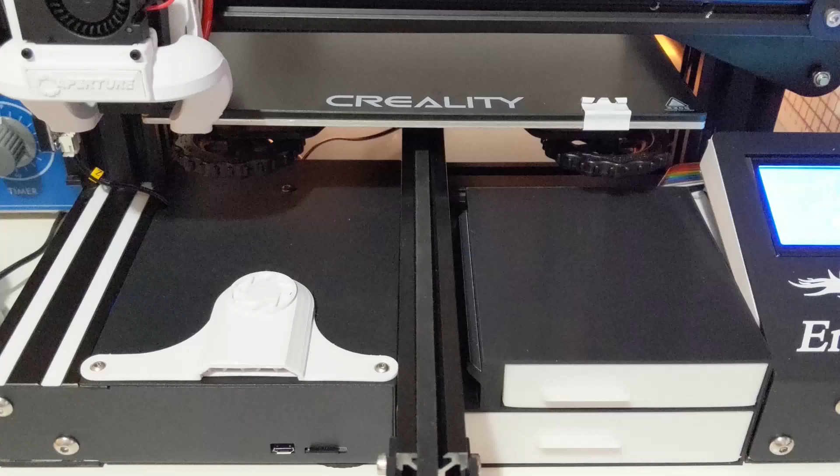Today we're going to be designing a mount for the TP-Link C200 smart camera, and we're going to do that in Tinkercad. This was a request from a friend and he wanted a mount for it to sit on his windowsill that will give him some height adjustability and some tilt functionality. Now looking online we have found a couple that offer the height but not the tilt.

So let me throw up my sketchbook on the screen here and you can see we went through a couple of iterations of designing to try and figure out how we were going to do it. Now my first design, as you can see here, was a ball and socket joint with a screw thread in the ball and sockets that would enable the height adjustment and the tilt adjustment all in one ideally simple solution.

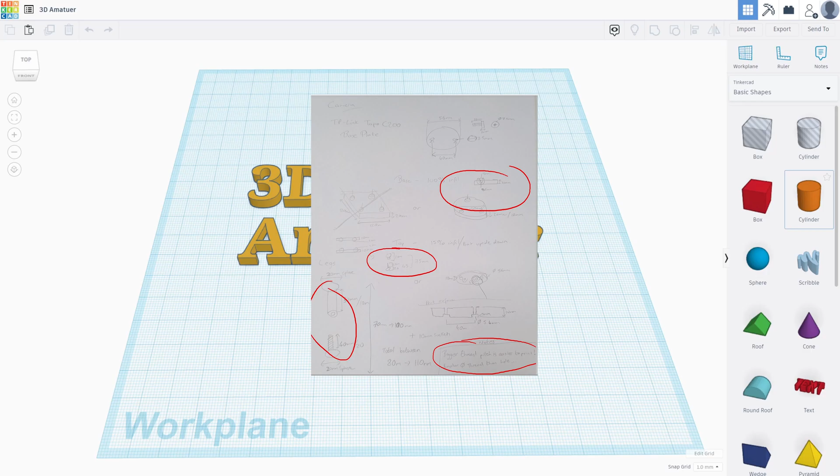But it turns out that 3D printing screw threads is not the easiest thing in the world, and for the size that we're looking, it's going to be quite weak with PLA. So I decided to abandon this idea and go with a scissor lift. After looking online, I found this, and it's a scientific lab jack. Now this is ideal for what we need.

So it has a height adjustment from 45mm to 150mm, whereas we need from about 50mm to 100mm. So this is perfect and it's within that range. However, it doesn't have the tilt functionality. Now I was given two options here.

I could purchase this and design a top plate for it that enabled the hinge functionality, or just go full on and design. And as this is a channel about me learning 3D design, I thought I would design everything. Although we are going to take the ideas from here and we're going to implement them in our own way.

So the camera we're designing for is this one here, which is the TP-Link Tapo C200, as I said. And as you can see, it can be mounted upside down, on a wall, or however you want to mount it. And the way that this works is it has a base plate that has a bayonet fitting on it that the camera attaches to, and it has two screw holes so you can attach it to a wall.

So if we return to the sketchbook, you'll see that what I did was got the measurements from that, and I've measured out the size of what I want it to be, and that center circle is the size of that base plate, with the two screw holes slightly offset, so when the camera attaches to it, it is centered.

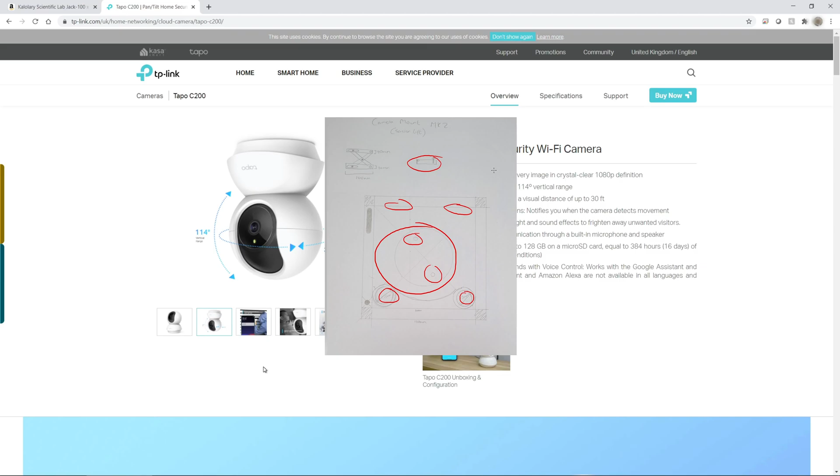And what we're going to do is we're going to have a simple base, which I've already designed in Tinkercad, and then we're going to design the top that has a functionality where it's going to have two hinges at the top here, and it's going to have two screw threads here, and as you can see from this little diagram here, they're going to go through, they're going to rub against the base inside, and it's going to create that tilt functionality.

So here we are in Tinkercad, and you can see my Aperture Science logo designs, but we'll save that for another video. And you can see my first iterations of the ball and socket joint with the screw thread.

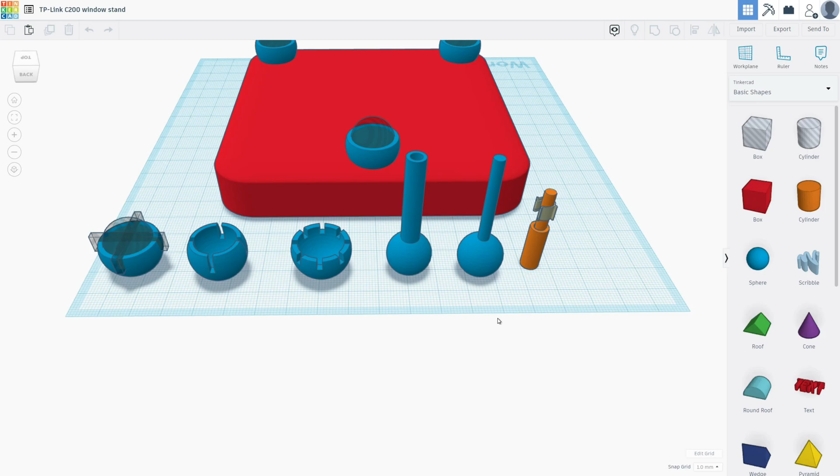Now the ball and socket work perfectly, but the width of this and this was way too small to be able to be effective and hold up any weight, and was very weak indeed. So the first test prints I did of the ball and sockets and the screws did not go to plan, and everything broke. And the screw thread didn't work because it was too tight, a whole host of issues. So I abandoned that idea and we started on this one.

So if I load this up, you can see here my design for the base, which is very similar to the lab jack stand that we just saw on Amazon, and it has the sliding hole here, circular hole here, and the arms. I've left this one open so I can show you how I designed these, which is very simple, just using primitive shapes, and I can give you a quick example of that if I ungroup these.

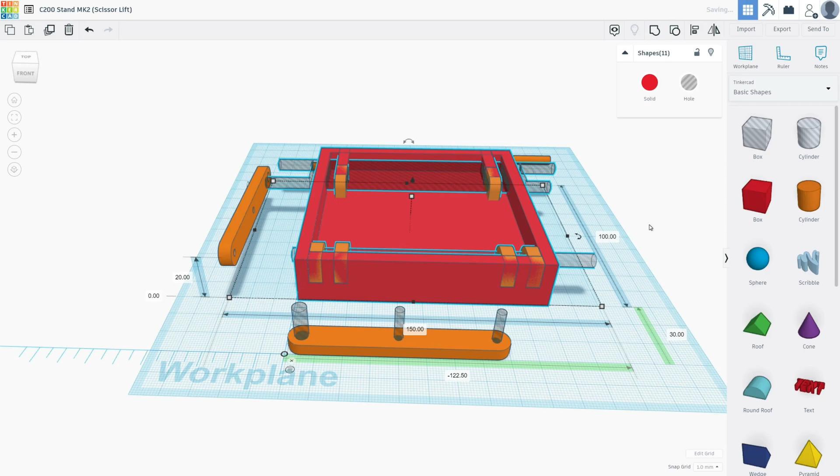So if we ungroup all of this, you can see there's various primitive shapes in here and other primitive shapes that we've set as holes. So Tinkercad is very simple to use in this respect. So if I group these together again, using the group function at the top here, you'll see they become one object. And that's the basic design process.

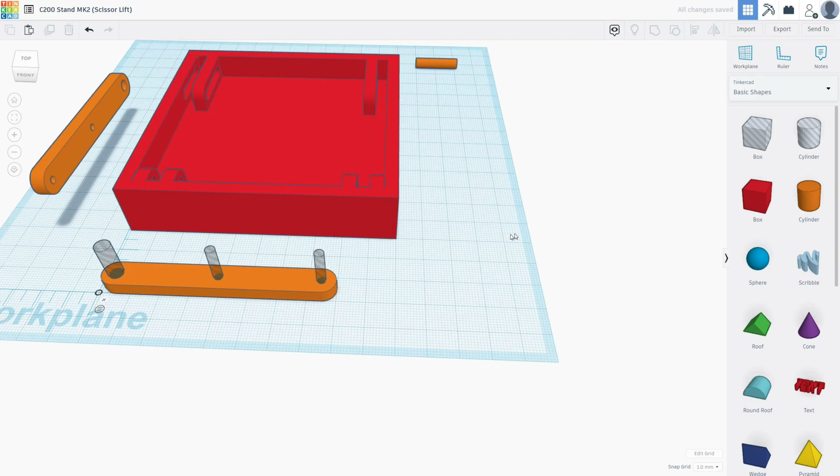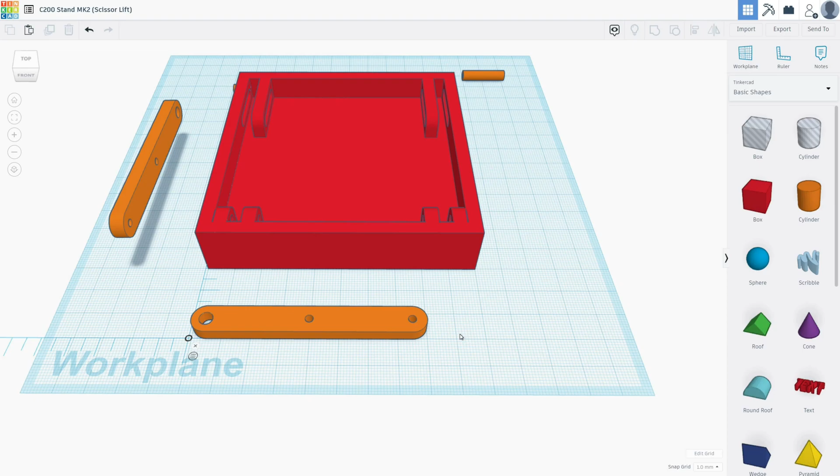I've tried to keep everything as simple as possible and using primitives and some very basic holes, as you can see here. So if we group these together, you'll see that they then become one object with the holes exactly where we need them. I've designed this around the M3 screws. I have quite a lot of them from another project that I was doing, so I've tried to design it in such a way that I use M3 screws for almost everything except the bit that allows it to extend.

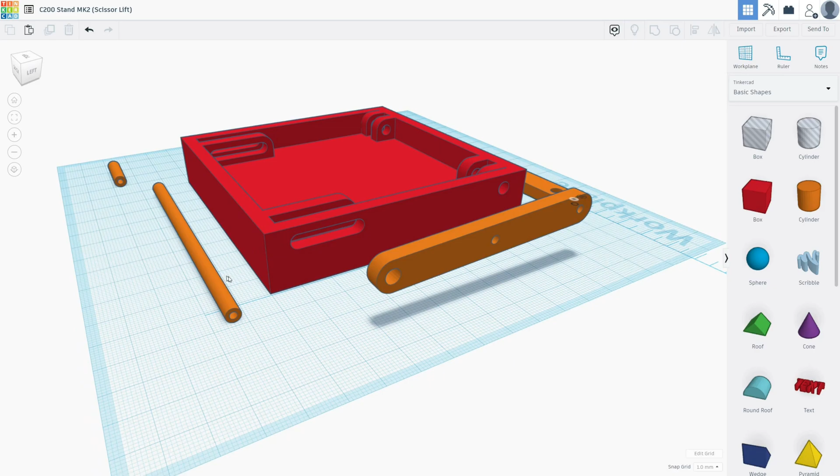So that's what these are here. So we have one of these that's going to go through here and it's going to attach to here, and there's going to be on the outside a washer and an M3 screw. That will then screw into here and hold that tight, and we'll have exactly the same on the opposite end. And then the smaller ones are to go in here to do the exact same thing.

Future me here, just jumping into the video to point out that this system didn't actually work. The axles on the left of the screen there don't really work at all. They were too small because I keep forgetting what scale I'm working in, and they were just too flimsy to hold any weight. So I did redesign another system that fits in place of that, and we will see that at the end of the video in the final assembly, so stay tuned for that. And now back to the video.

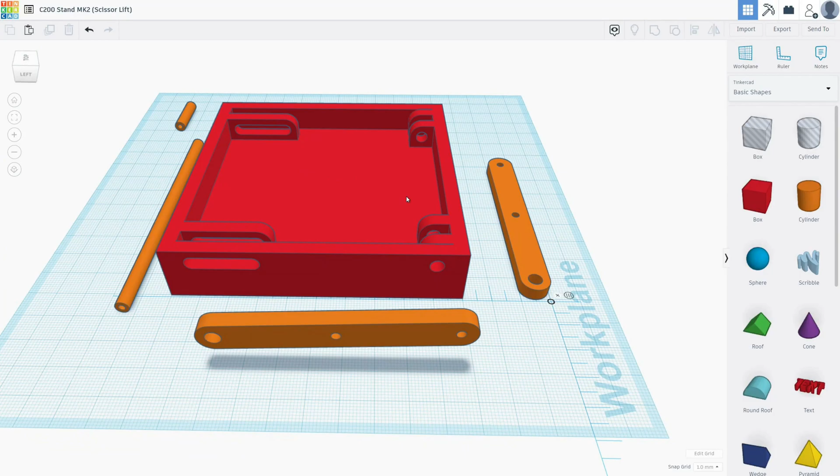So once this is all connected, we'll then have the scissor function, and now we just really need to design the top. But before we do that, I'm going to save these files as STLs to make it easy to print. So to do that, really simply we'll select the item that we want, because I don't want to print all of these in one go. So we're going to select that, and we're going to go to export. Hit STL, and then it will download it as an STL file.

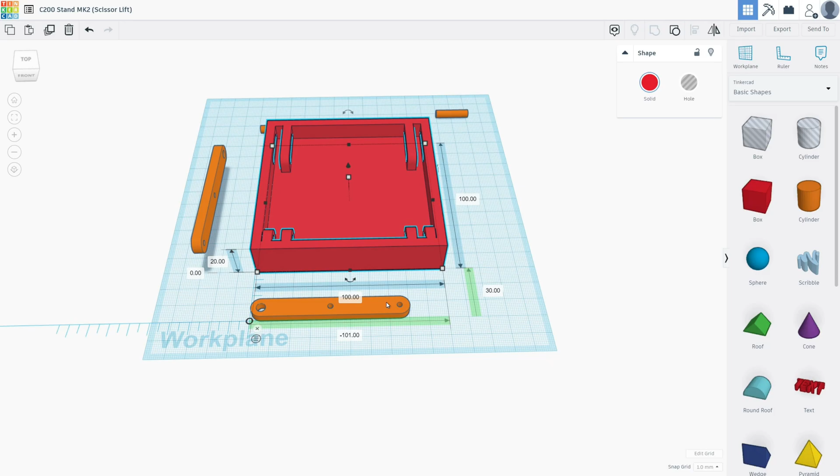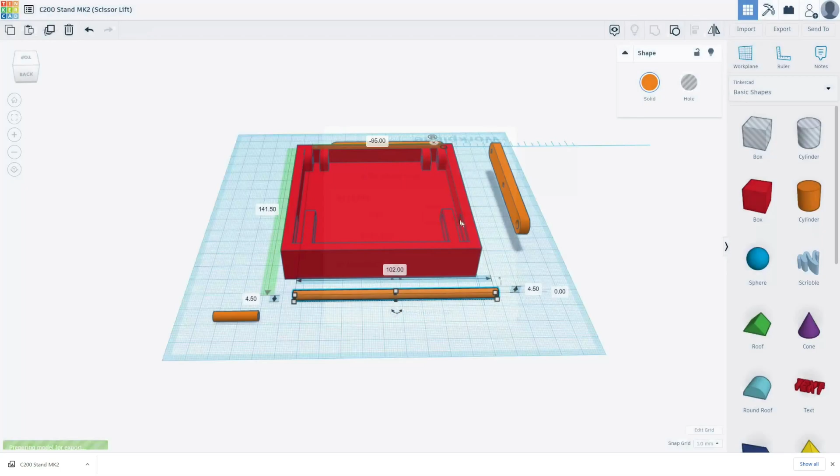Then we can select one of the arms, and we'll do the same thing, export as STL. Now you can export all of these in one go, but as I've been designing different things on the same work plane, I want them all to be separate. And then we'll do the same thing with these two here. So we'll export that as an STL, and then we can export that as an STL. Let's get designing the top.

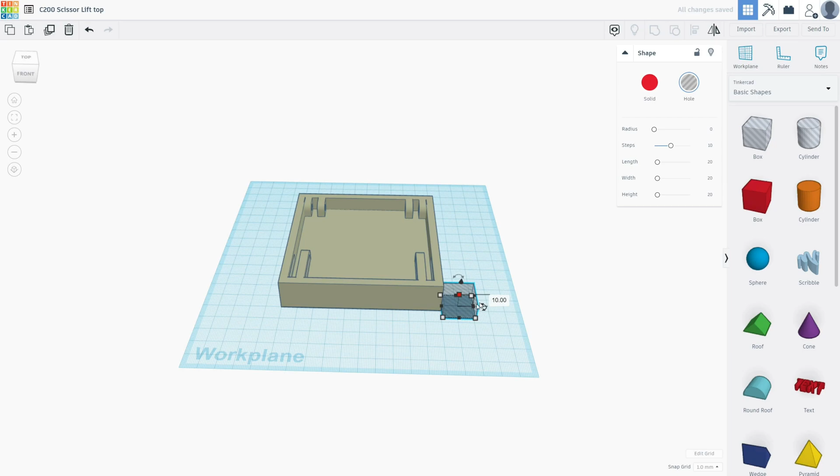So I've opened a new project in Tinkercad, and now we're going to design the top. Now the simplest way I can think of doing this is we're going to take the top that we just exported, import it again, and now we're going to create a hole, and we're going to completely cover the bottom half of that, group them together, and export this as an object. So that will be our top. And then what we'll do is we'll design a very simple plate with a hinge, and then we'll attach that after the fact when we go through assembly.

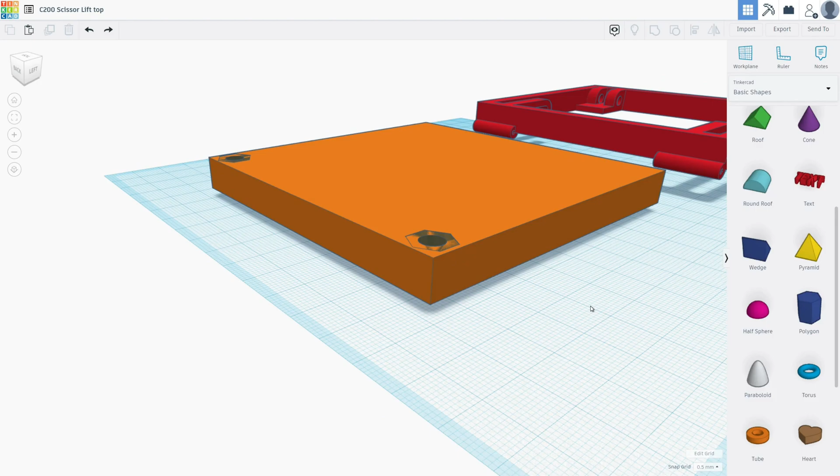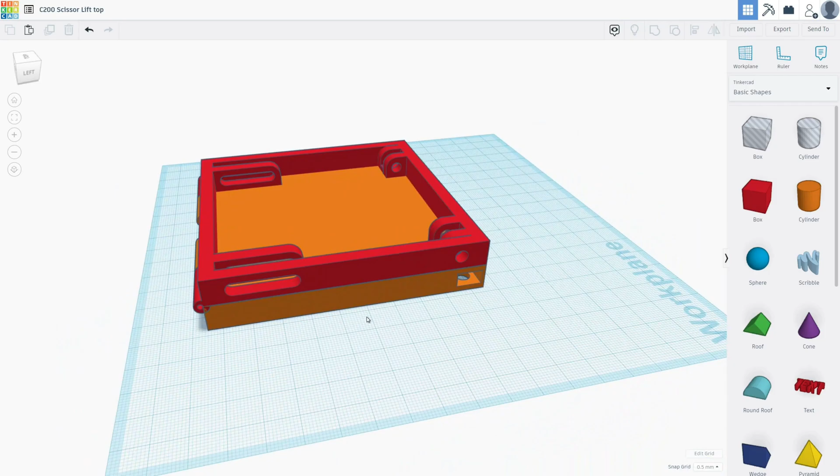So there we have it. That is the final design for the hinged top. We're going to have the hinges here, and this is going to rotate that way. Oh, keep me doing that.

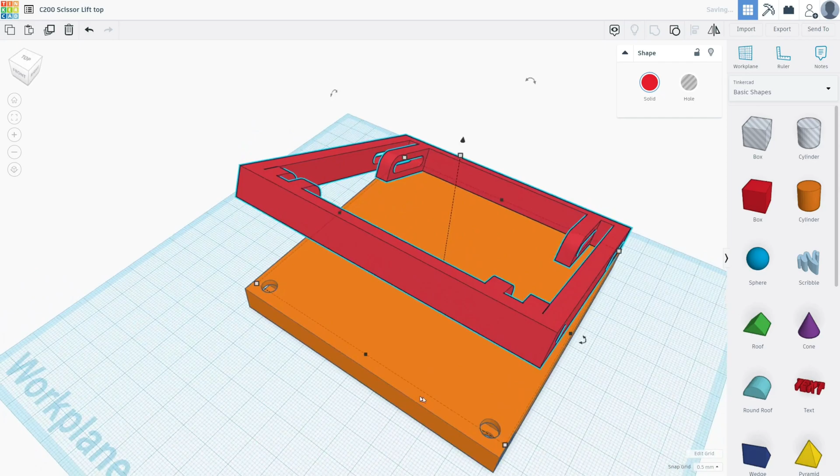And raise up. And the way it's going to raise up is by using an M6 nut in here with an M6 bolt in there, and that's going to screw upwards into this plate here. Well, not into, but onto. And then that should support it enough with the additional supports here and here to be able to raise it just by that little bit. So hopefully that should all work.

I don't see any reason why it wouldn't, but just to be sure, what we're going to do is we're going to test print this little section here and see whether it works. So to do that, I just need to extract that from everything else, save it as an STL file, and then we'll do a quick print.

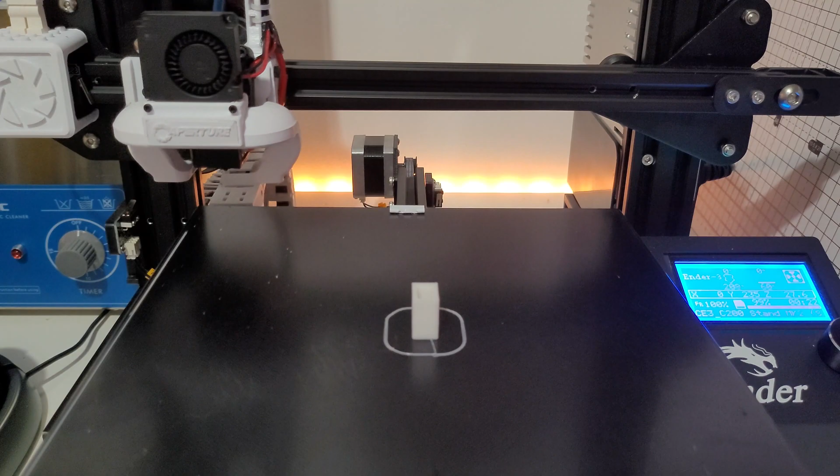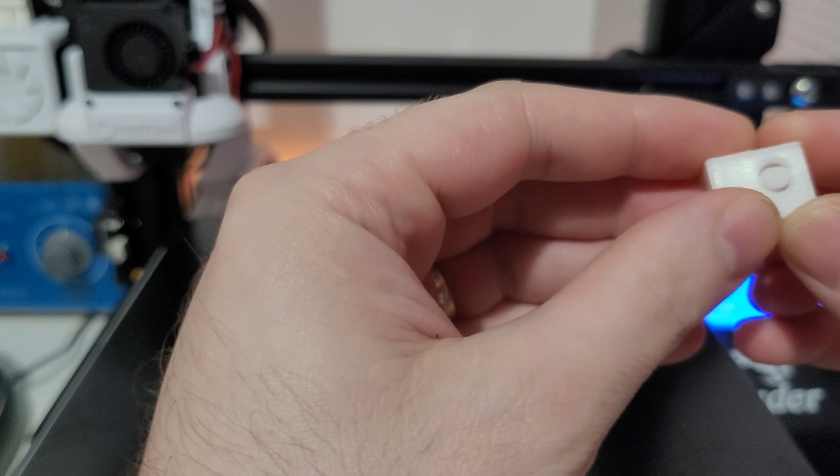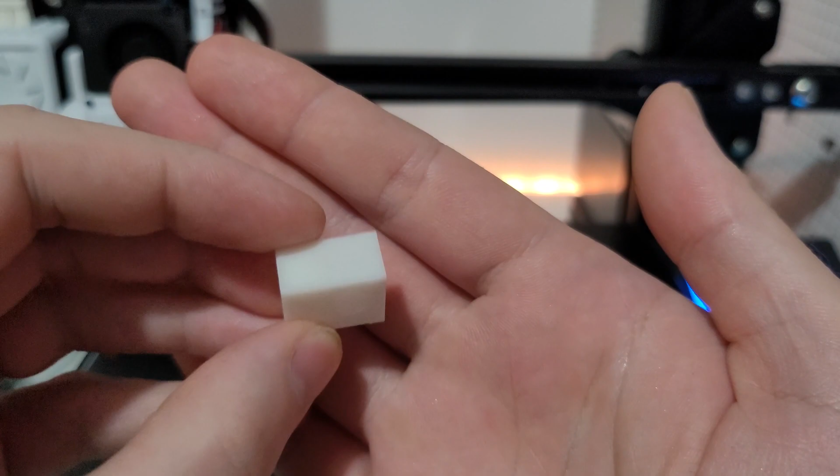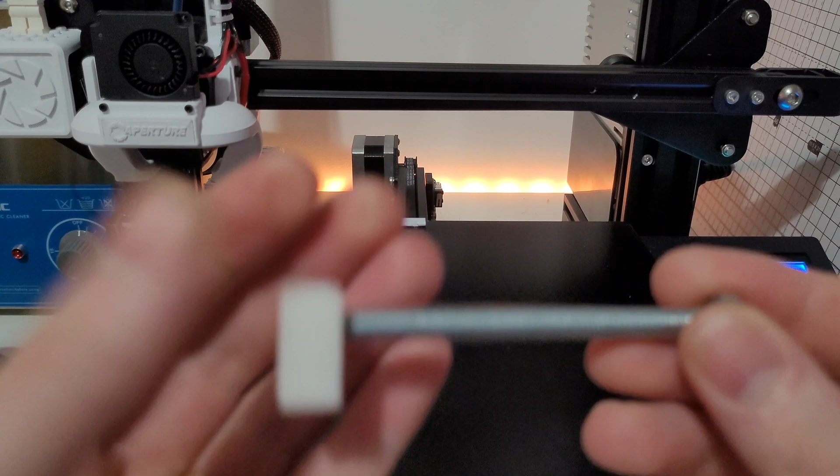Okay, that seems to have worked. Let's poke out these holes, get a nut in there and see whether it actually manages to... there we go. Yeah, poke out them supports and see if it works. Okay, so supports are out. It does just about fit. You do have to screw it, but it does just about fit a 6mm bolt. So that is good. Let's get a nut in there and hopefully it will work if the camera decides to focus.

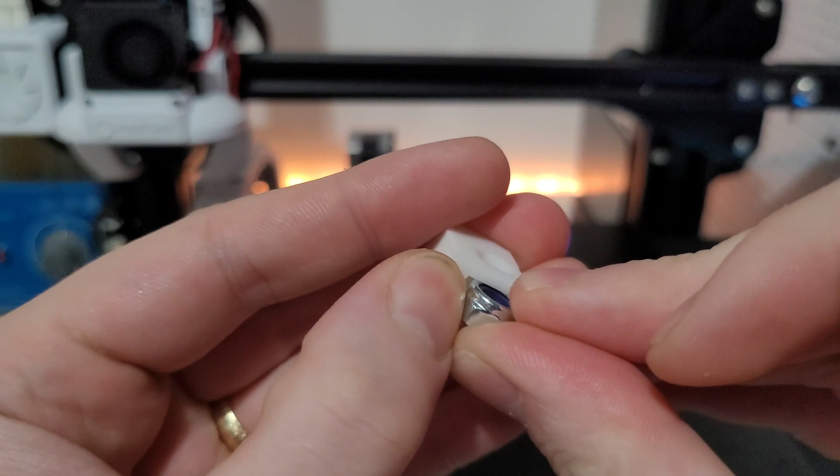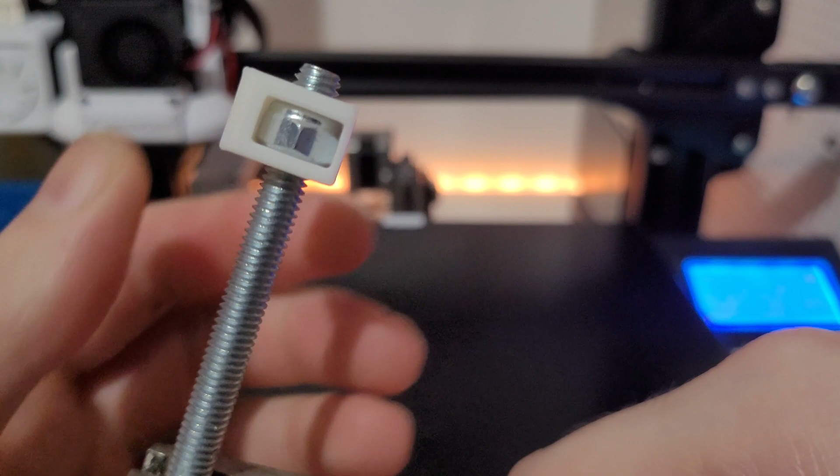Oh, that's a little bit of a tight fit. Oh, look at that. Beautiful. Right, and then screw. Ooh, oh, that's a bit tough on the old hand tightening. And there we go, we're able to tighten the bolt. That should work perfectly.

Okay, so after that successful test print, there's only one thing left to do, and that is to put the mounting system for the camera into the other side of this.

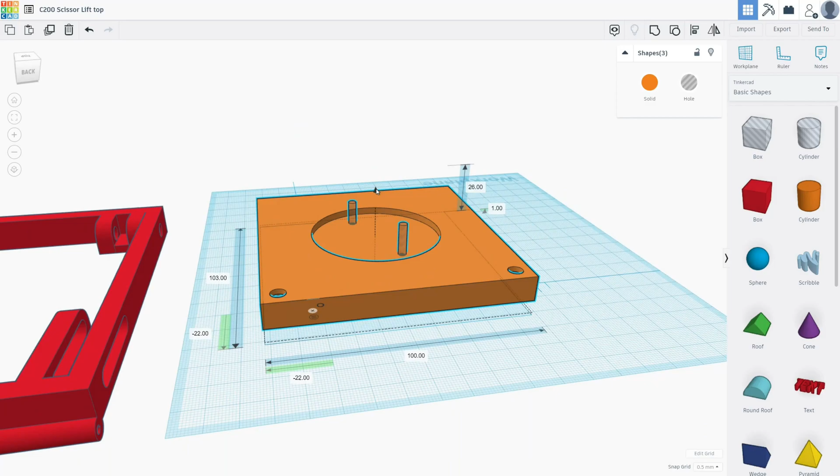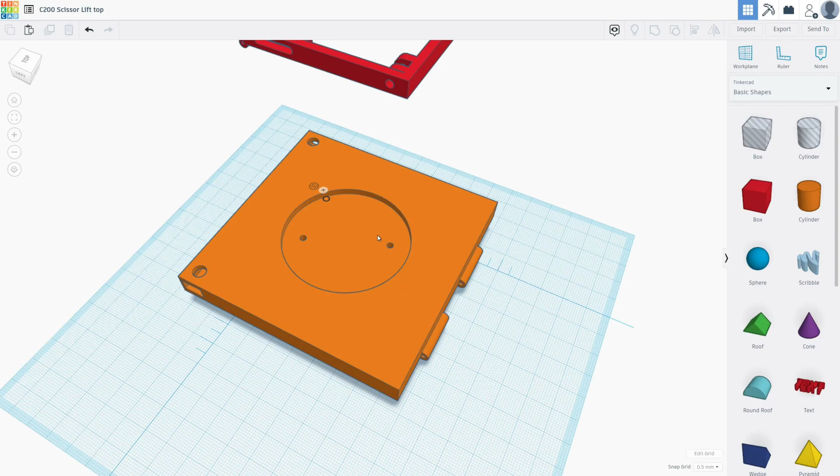So a bit of a long-winded way of doing it, but I've managed to offset them by 22.5 degrees. We've got two 3mm holes that the base will screw through, and this is now all measured out correctly. So it's just a case of getting this printed. Now I think I'm going to have to print it with this side down, even though that will mean I will need to put some supports in underneath here. But that shouldn't be too much of a problem. Everything else should print fine.

And same with this one. It's going to have a couple of supports, but otherwise should print fine.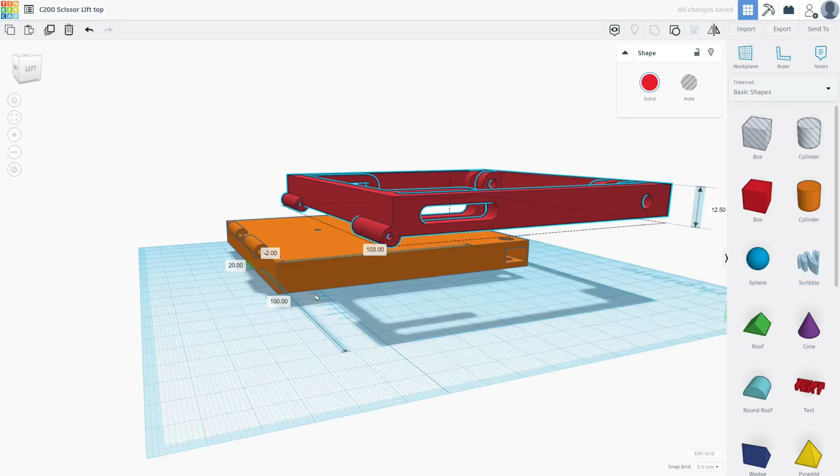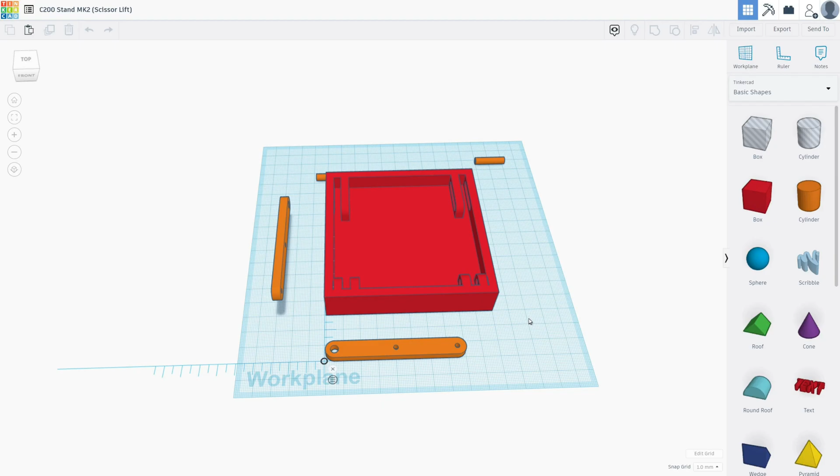The last thing we need to design is the holder for the screw thread. So if I come back to here, this piece here, that's going to hold the screw thread in there. And if we have a look from a different angle, you can see there it's going to pull them together. So what we need is for this one to screw in and for this one to pull. So that's going to be a bit more of an interesting design on how we're going to do this. What we need to do is, as we screw this, it pulls that bit towards it. We're going to use M6 spacing again for this. So let's head back to Tinkercad and let's get designing.

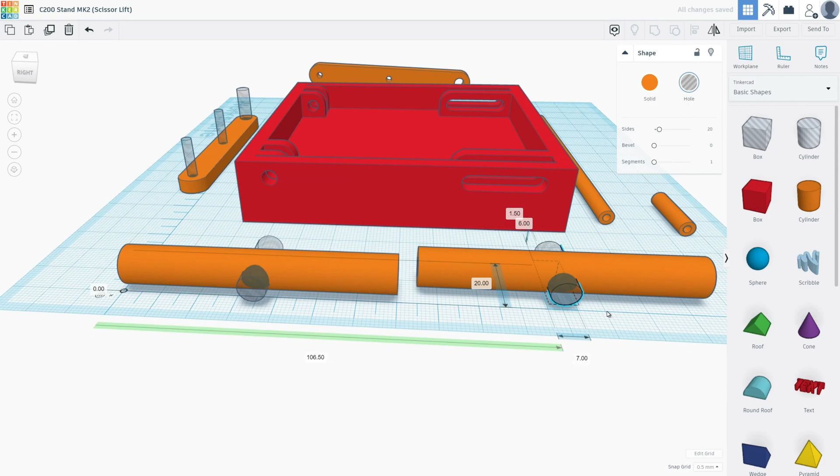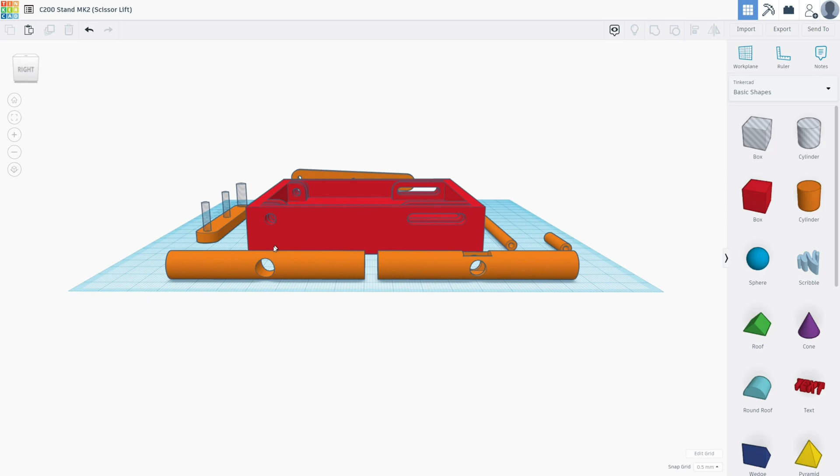Okay, so what we've designed here is two bars to go between the holes here in the center. They both have 6mm holes in the sides, so we can use a 6mm bolt to connect them. And then one of them's got a 7mm hole, so it should be able to slide straight through. The bolt should. And then the other one has a 6mm hole, but also with a space for a nut. So this one will be the one that pulls, and it will slide through here. So this should all work together, just like we have on here. So as this rotates, it's going to pull that one, and we're going to have the end resting on here. So we'll probably need to create somewhere for the bolt to actually rest as well.

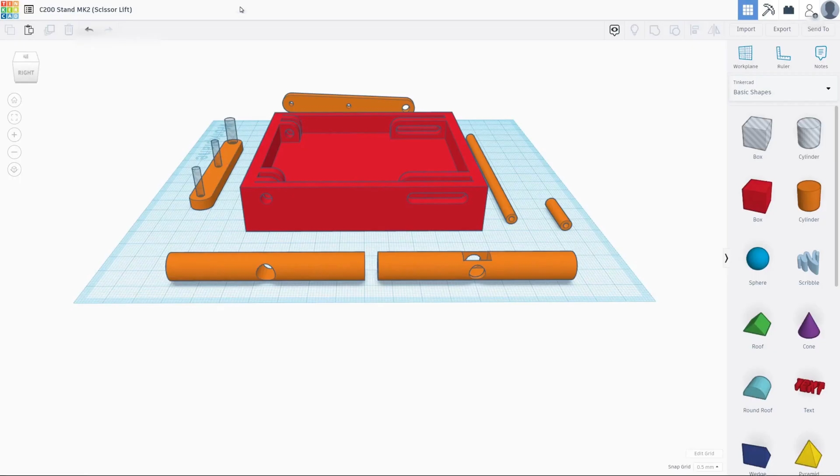So let's do that. Okay, so I think we are actually ready to save and print, and then hopefully, if everything prints correctly, time to assemble.

Okay, so we've got a new Tinkercad file open, and the last thing to design is the adjustment knobs for the elevation, and the adjustment knobs for the tilt. And then we'll be ready to print.

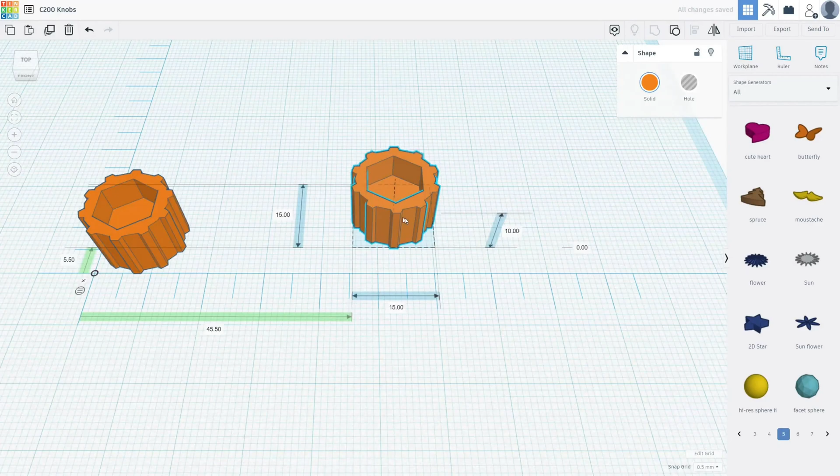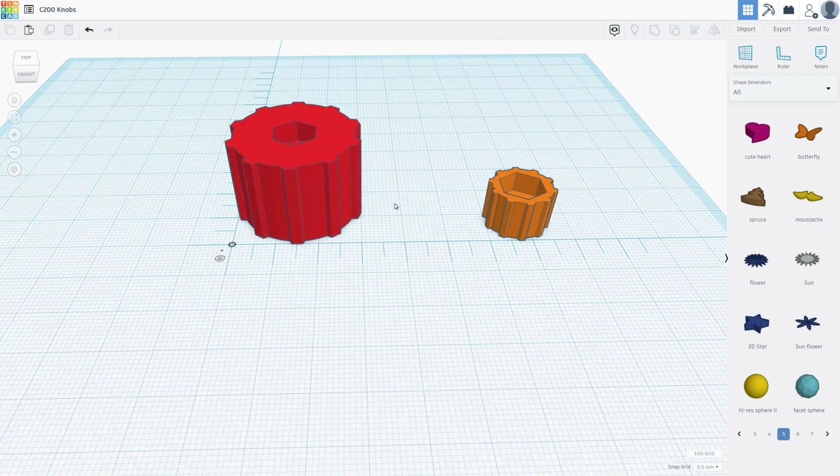So I think we're done. I've designed some very basic knobs that are going to press fit onto the end of the bolts. So we've got a smaller one here, which I'm going to print twice for the adjustments for the tilt. And then I've got a bigger one here that is going to be for the adjustments for the height. So let's get these saved, and then I think we are finally ready to start printing.

So here we are finally in Cura, and we're going to import all the files and get them ready to print.

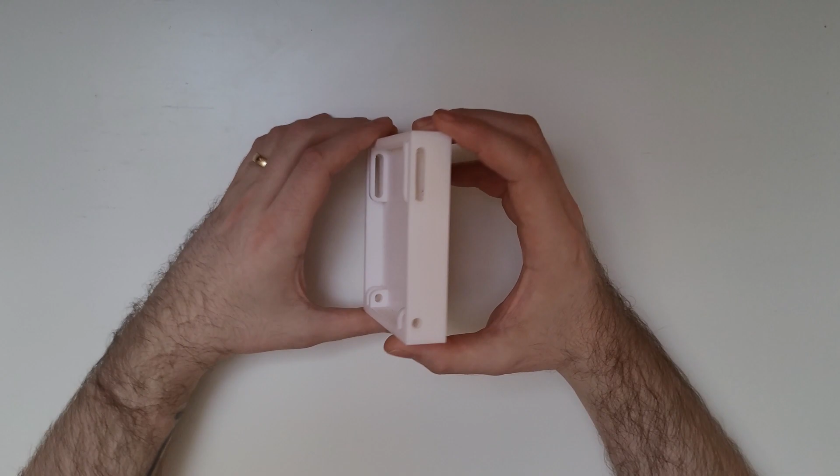So we're finally at the assembly process. Now there were a few trials and tribulations through the printing process and test fittings that I did. This was the original base plate, which is 20mm tall, but once fully assembled, the entire assembly was 5.7 centimeters or 57mm, and ideally we needed to get it down to 50. So with this being half almost solid, I was able to take that additional 0.7 off of the base, ending up with a thinner base, but functionality wise it's still the same.

One of the annoying things about this, however, was the first print I did, which I stopped halfway through. I didn't realise I had warping on one of the corners until quite far into the print, so that was a bit of a fail and a waste of about 7 hours worth of printing. Good fun, but we have our base.

So let's pop that there.

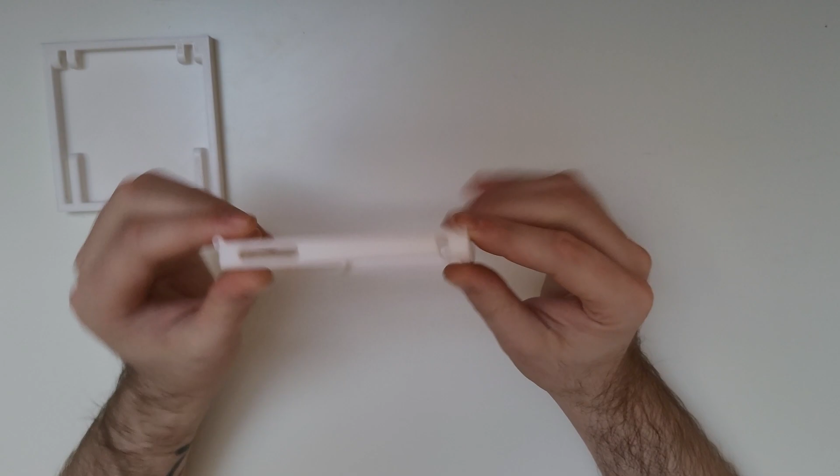Then we had our original top plate or top frame. This again seemed perfect with the exception of one thing: these holes here would fit the arms perfectly, but I added plates in to press against for the tilt function. Because of that, when you look through the holes, they're actually pressed up against it, so when we got one of the arms in, it wouldn't actually fit through there. So I had to redesign that, which is what I did with this one.

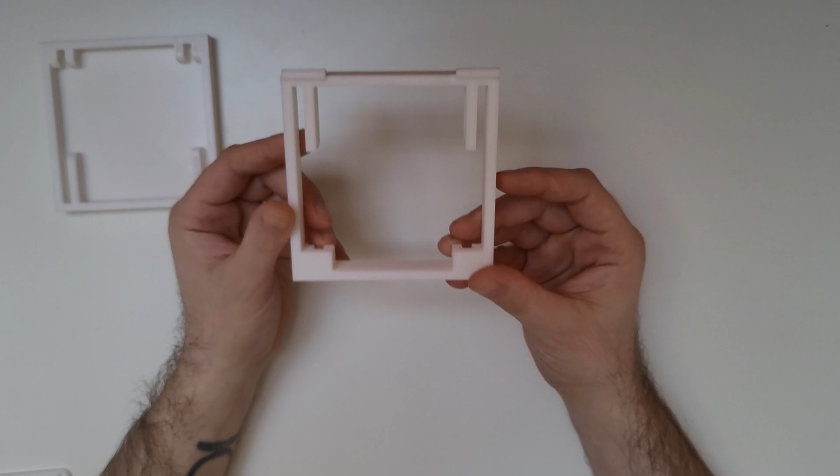And again, seemed perfect - the holes all lined up, perfectly fine, until I decided to assemble it.

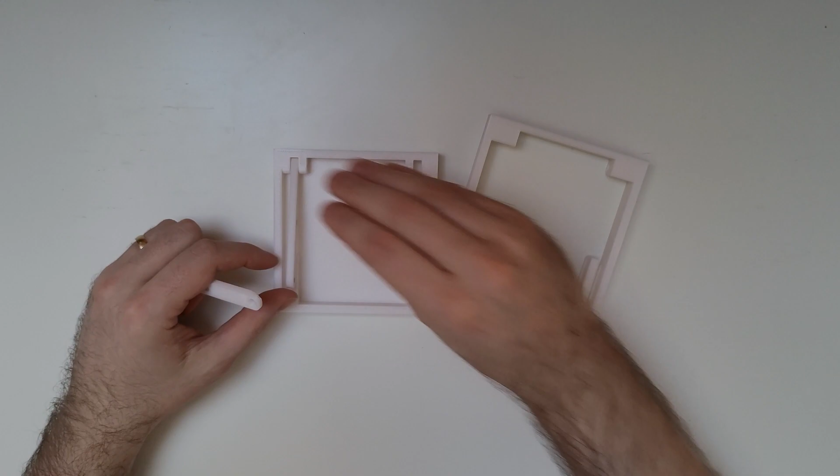When you do a scissor lift, the idea is that this stays flat, but because these holes here were actually directly opposite each other, the scissor lift didn't fit because the arms were offset. If I bring a couple of the arms in, when you do a scissor lift they go like that, which means they're offset. If we pop this in here, that's perfectly fine, but then the offset one wouldn't fit into there. So I had to redesign it again, and that is what this one is here.

So this was the final design. I also didn't realise how hinges work, so I've had to create some little indents in here for the hinges to work with the top plate.

So the top plate we have here was pretty much the final design. I didn't really need to do anything to change this, just tidied it up a little bit. There were a few little misprints, which is why it's not great printing with supports. I did need to use a Dremel to trim this edge here, so unfortunately it's not the prettiest because you can start to see some of the infill, but once it's on, it works fine.

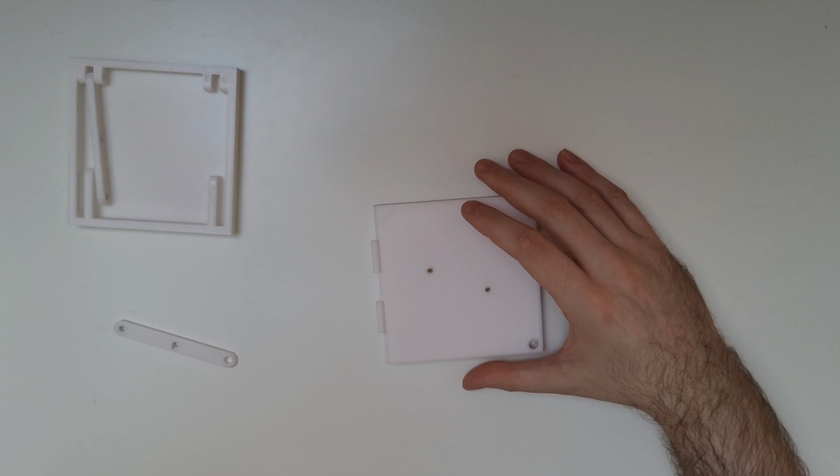So again, even though I had done the indents in here, initially that didn't clip together, but now it does perfectly. So we have our top with our hinge, we have our base, and we have 8 arms.

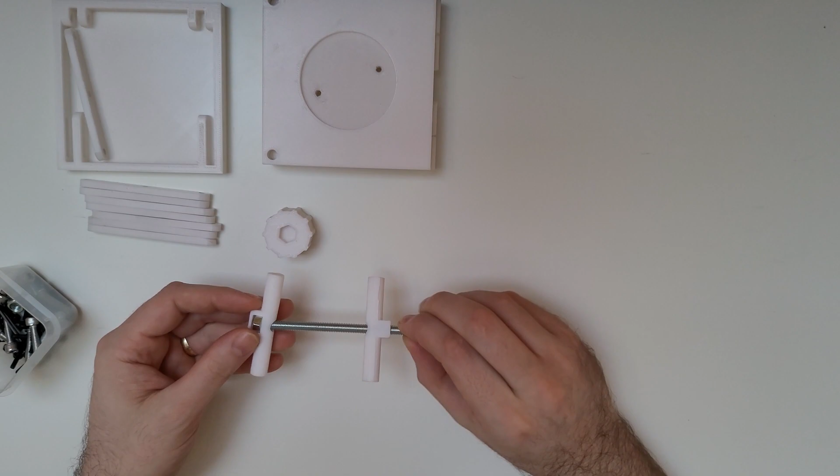These will all be connected together in a scissor lift functionality. We then have our knob for the height adjustment, which will attach to that bolt, and then that will go through here and attach to this one, which I had redesigned slightly at the end so we can put a 6mm nut into here, and then that will screw into there and pull these two together, which will create the scissor lift action.

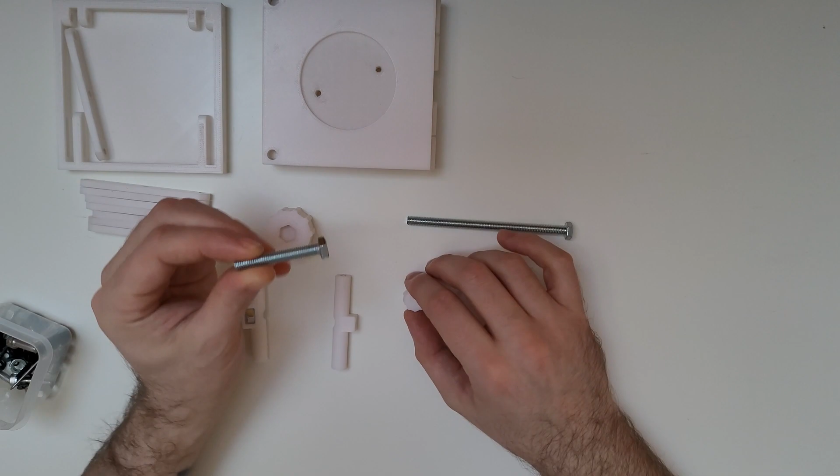Then we have our 2 height adjustment knobs, and the way these will work is we have a 40mm M6 bolt that these will attach onto the end of. Should be quite a nice press fit, but I am going to glue these together as well. And then that will go into here with another 6mm nut, which should press fit into here.

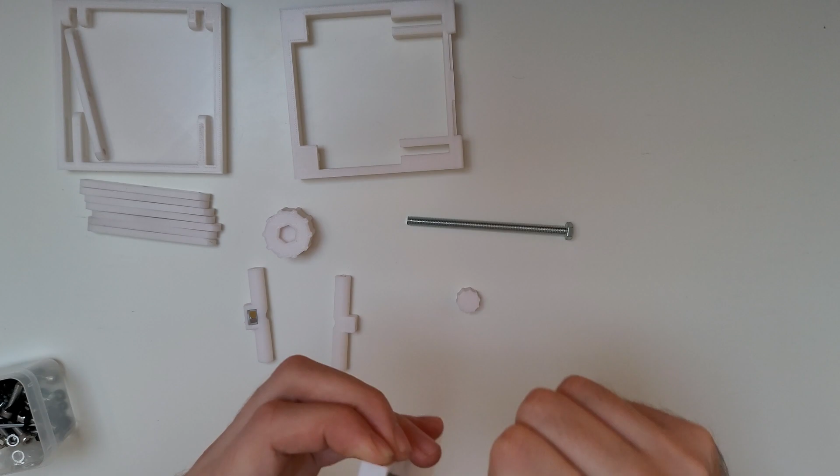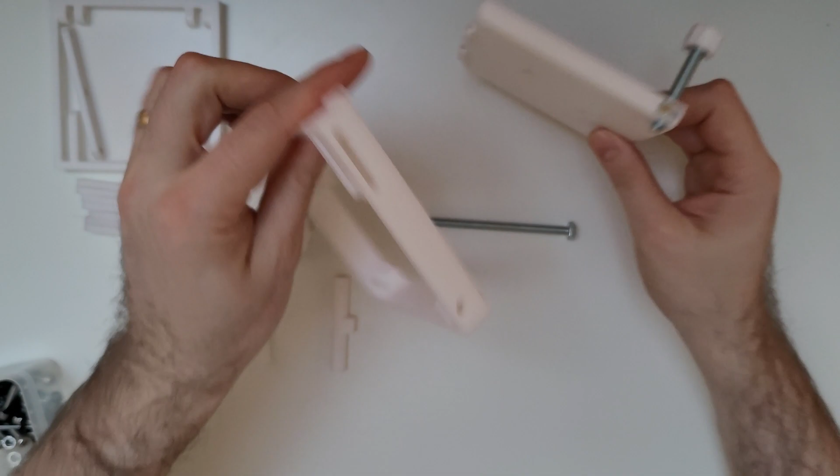Once that's in there, it'll screw into there, and this will create that height adjustment. So the way that'll work is it screws in, and when we've got the hinges in here, do it this way around so you can see, that will then keep pushing that down and give us our tilt. We've got two of them for stability, and then the final piece is all the little nuts and bolts we're going to need to assemble everything.

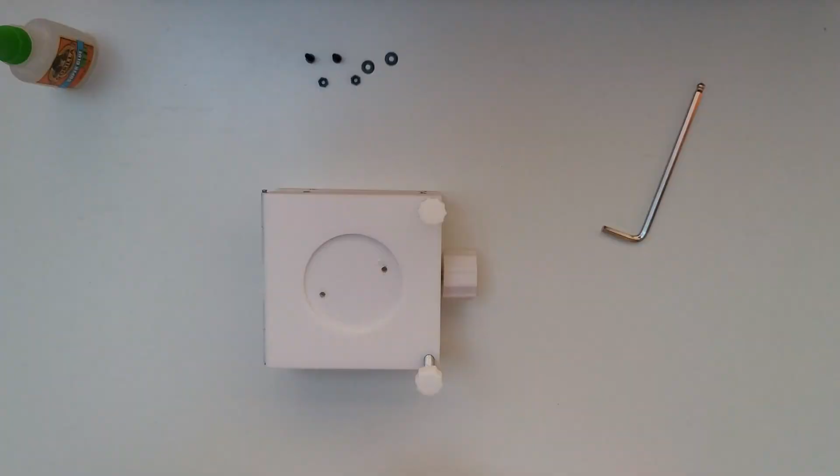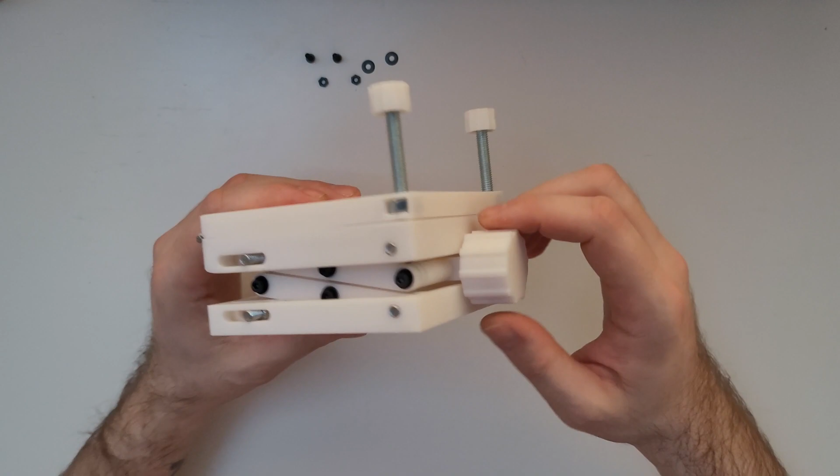And there we go, it is fully assembled, and hopefully you can see the way this should work now. So we have this little thread that will tighten here, which pushes against here, and then as that tightens, that will extend the scissor lift. Let me get it to maximum height.

The way that works is by pulling on the nut that's in here and just pressure fitting against there, and then that will pull the two legs together, which raises the scissor lift.

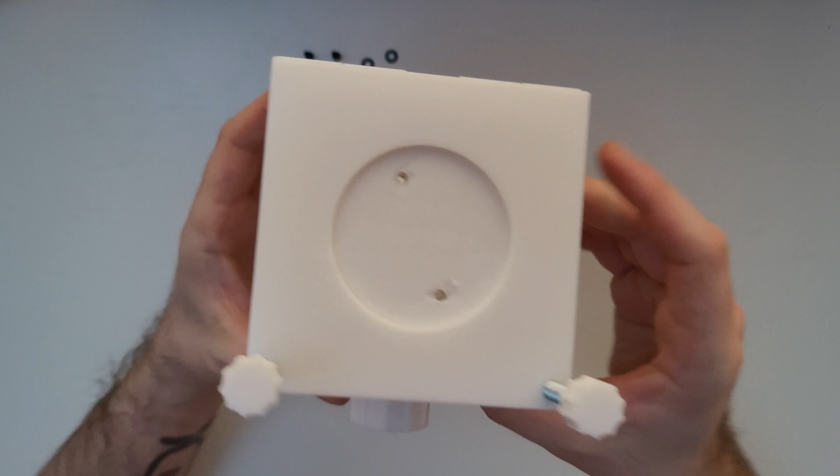So then the other functionality was the tilt, which we've got two panel pins in here that act as hinges, so that can move up and down freely. And then as you screw in these threads here, they push that up to create that tilt functionality.

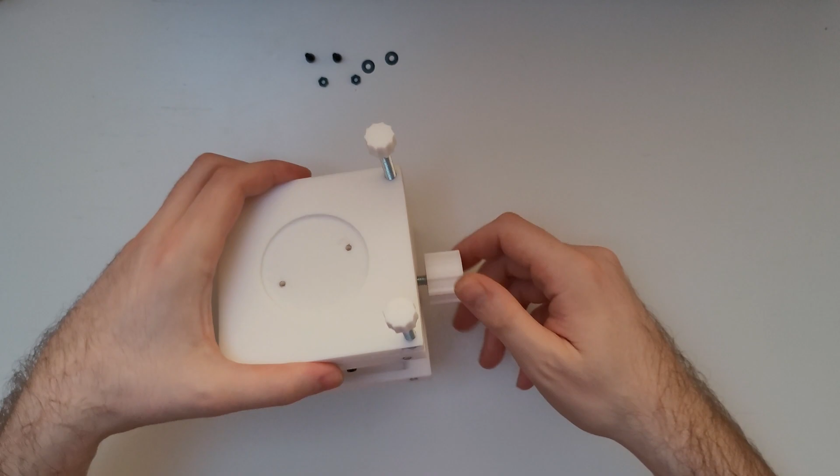So the last thing to fit, which is what these bolts and everything here are for, is the actual mount for the camera itself. So if I just lower this all back down, there we go, and this is the bayonet fitting that I was referring to.

What I've done is made this circle just tight enough for it to pressure fit, so you don't have to use the bolts if you don't want to, but that will pressure fit into there.

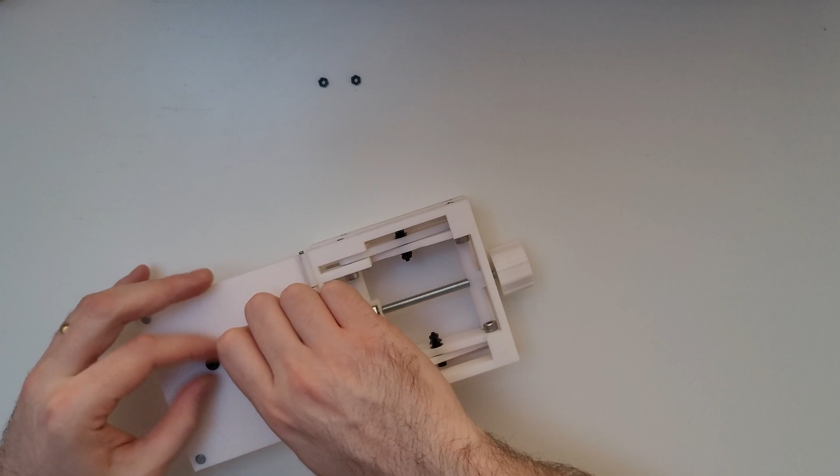And then if you are going to use the bolts, it's just a case of a washer and a bolt in this one, and a washer and a bolt in this hole here, and then just to secure them on the other side, you can affix a small nut.

This will still give enough clearance for the camera to attach. So if I tighten that up, it doesn't need to be particularly tight, it's just more of a hand tighten.

And there we go, the camera itself has the bayonet fitting on the bottom there. So we need to make sure the DC plug is towards the back, and then that will clip onto there. And there we go, we have a fully secure camera.

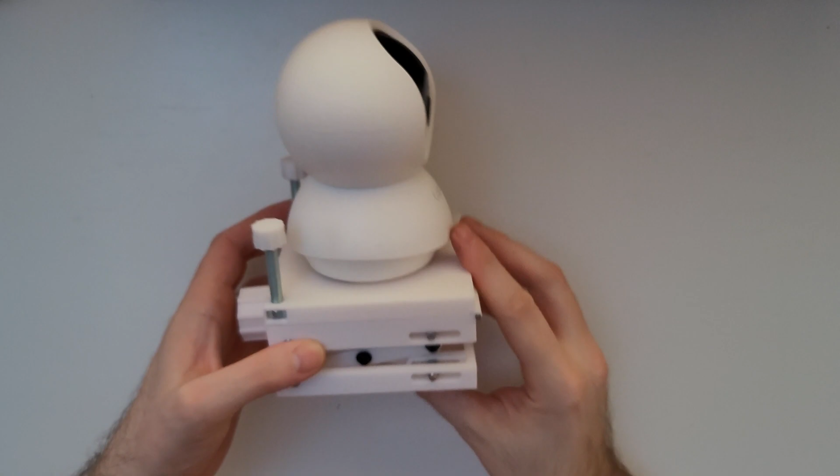And now, that way you can adjust the height and you can adjust the tilt. So let's see if it carries the weight, which it absolutely does.

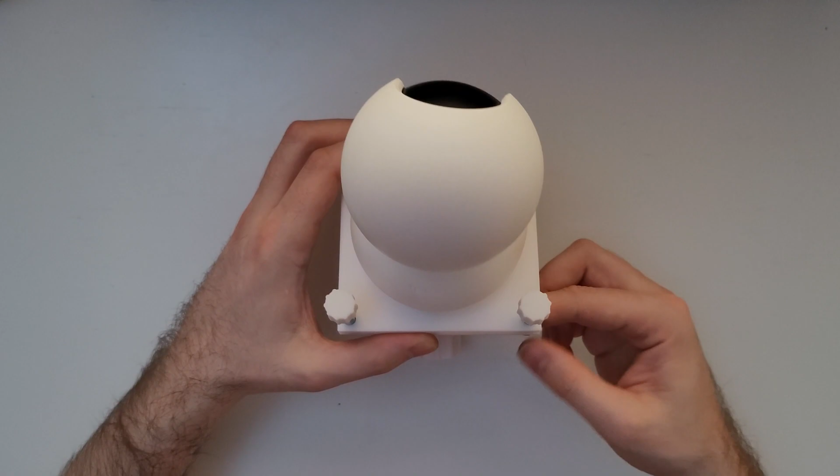Hopefully with the base being a little bit lighter, when this is at full tilt, it shouldn't tip over. Full tilt is about 20 degrees, so if we screw that one all the way in, and then screw this one all the way in, which takes a little while.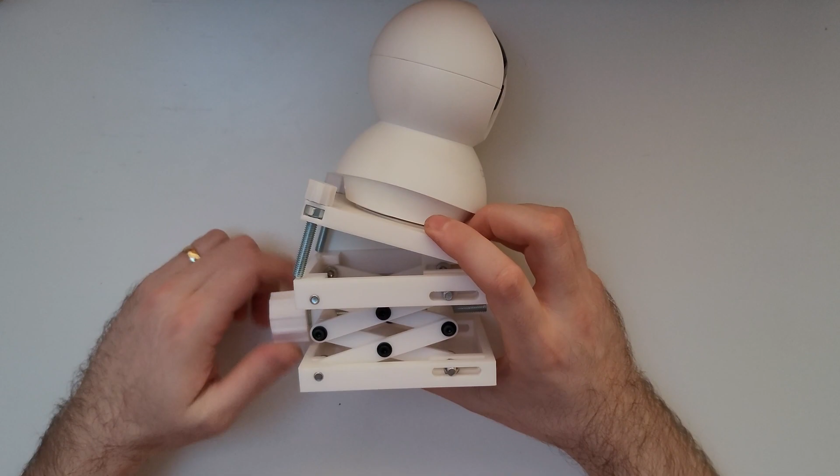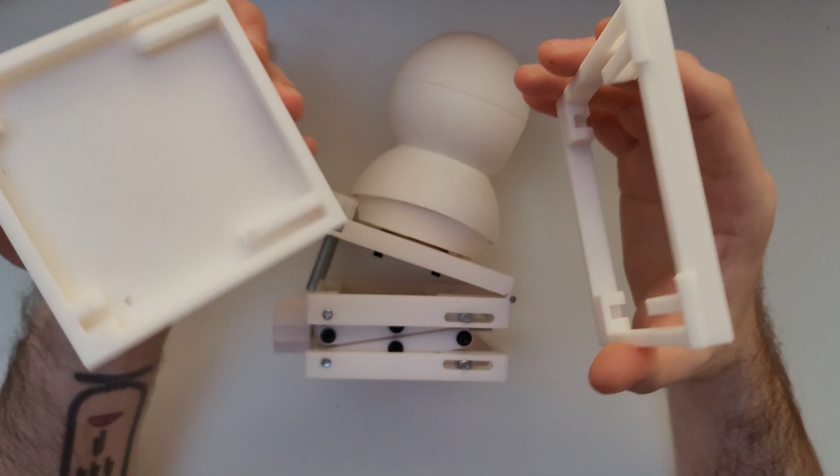Would you have seen any of these mistakes before I made them, like with the hinges, or the silly little things like the extra hole height here? What's your process for designing a 3D part? Do you test it in software, or do you print out smaller versions and test them? Let me know in the comments below.